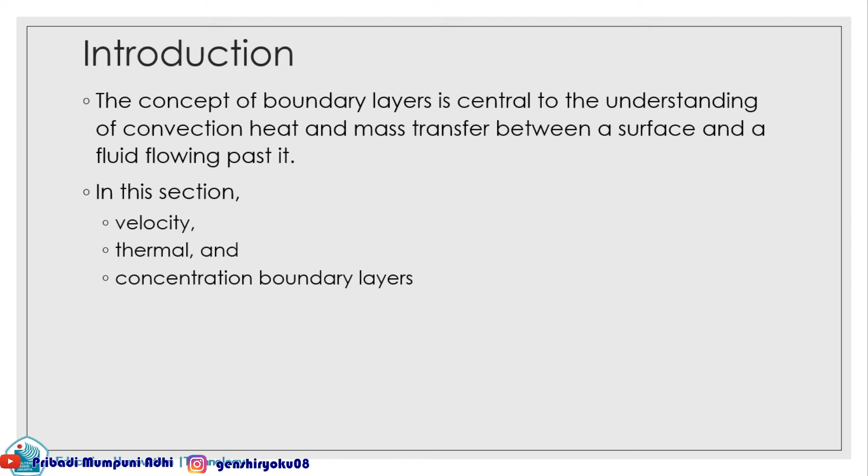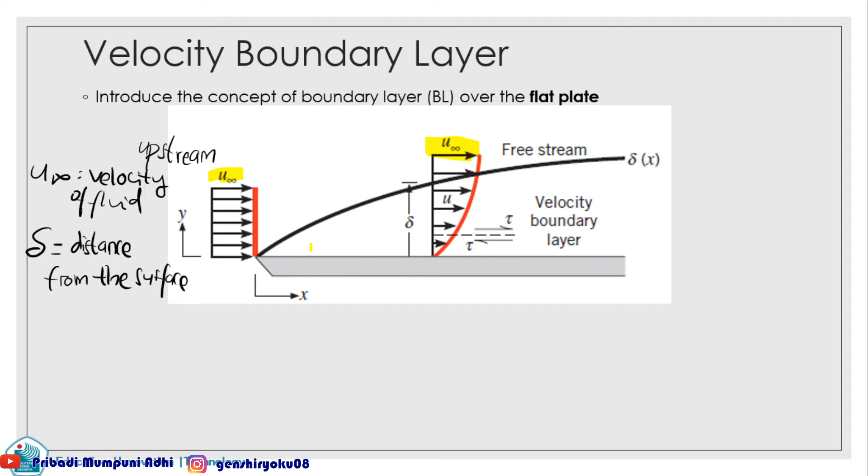So the velocity profile changes, further and further from the surface. So this velocity will be equal again with the free flow. So if we draw, this is the curve. The velocity profile will be like this curve.

And also it varies with the x direction. It depends not only on the distance from the surface, but also on the x. The x direction means how long the fluid has flowed on the plate. So with increasing distance y from the surface, the x velocity component of the fluid, u, must increase, until it approaches the free stream value of u infinity.

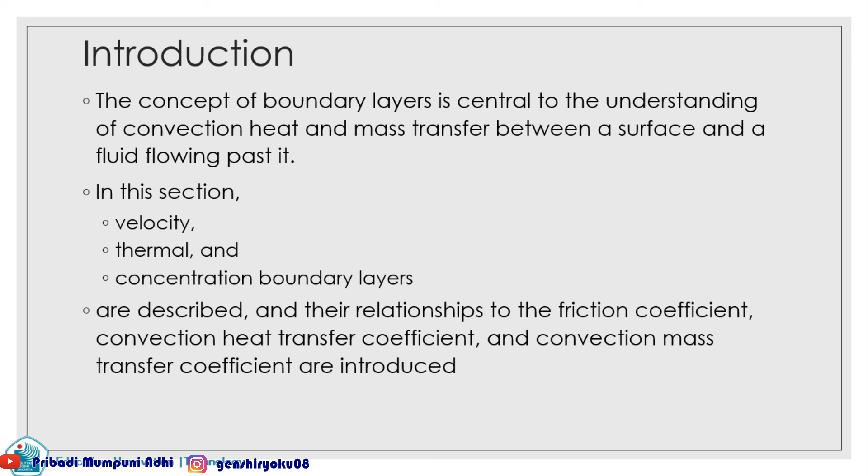Okay, so I will recap again. There are three types of boundary layer in this part. First is the velocity, the second is the thermal, and the third is the concentration boundary layer. The velocity boundary layer is due to the velocity difference between the free stream and near the surface, and it's influenced by the shear stress.

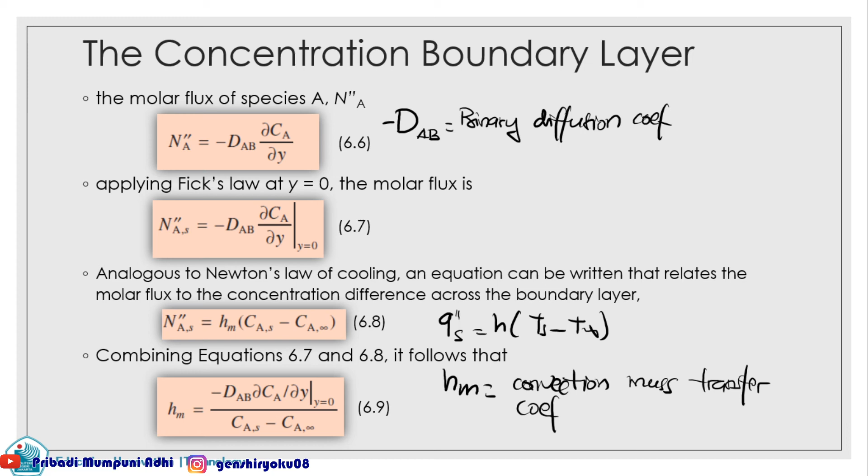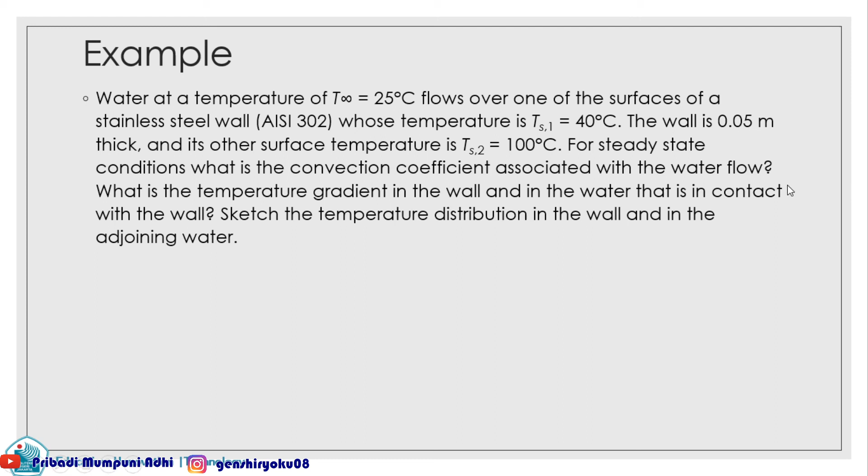Okay, so this one is the illustration. So what we know, the known is the surface temperature of steel wall and the temperature of the water flowing over the wall. Okay, so we can see here. Jadi ini adalah wallnya ya. Wallnya thicknessnya 0,35. So the TS2, this is without the fluid flow, the temperature is hotter, is 100 degrees C. On the other hand, the temperature when there is a water flow, TS1 is 40 degree C. So we need to find the convection coefficient and the temperature gradient in wall.

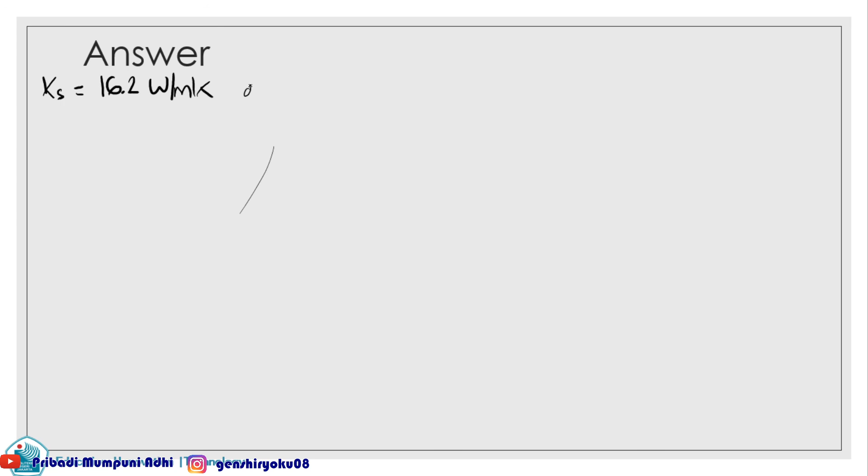Oke. So, we will need the KS ya. KS itu apa? This is the thermal conductivity of the steel ya. So, the thermal conductivity of the steel, the AISI 302 is 16.2 watt per meter Kelvin, at the temperature 100 degree C. And we need to know also the KF ya. The KF is the heat conductivity of the fluid.

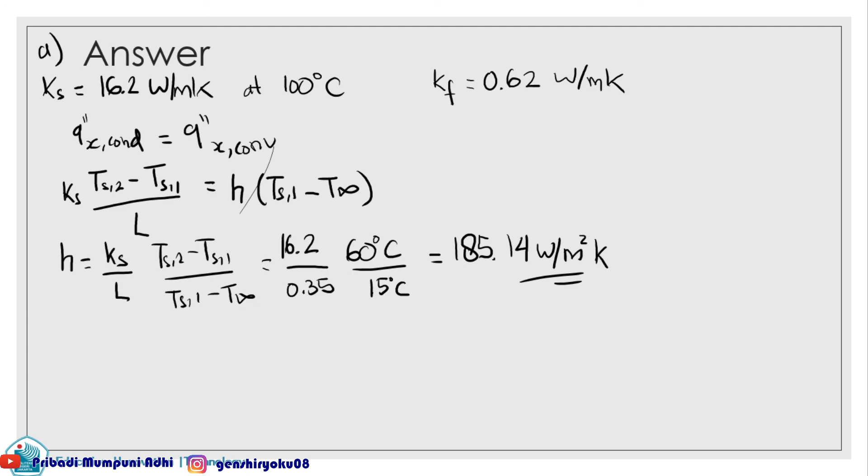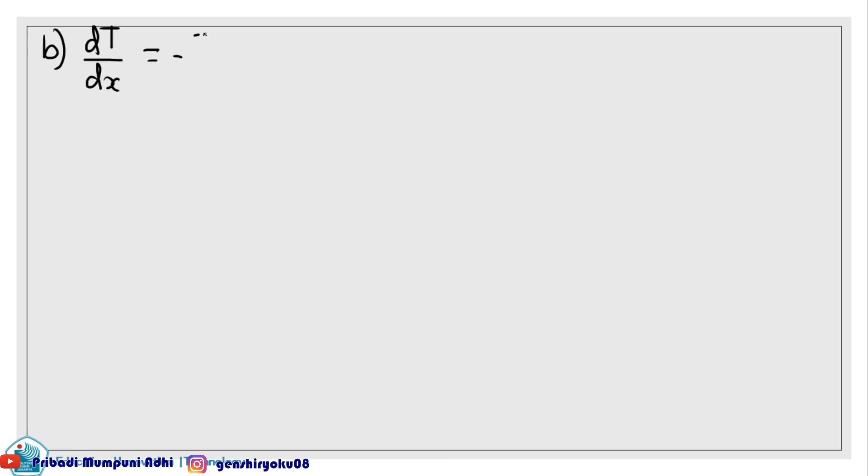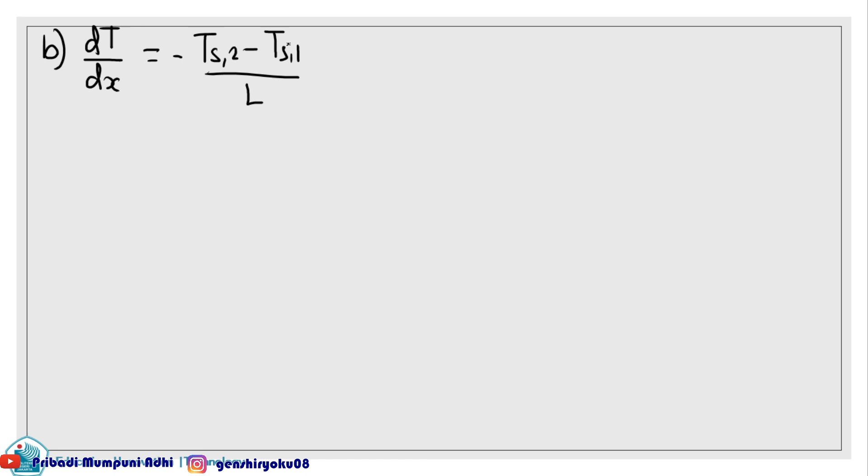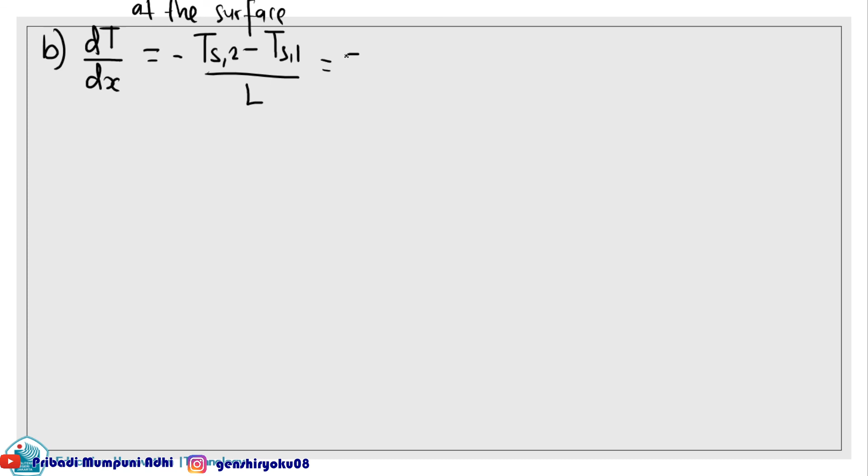B ya. Pertanyaan yang B-nya itu kan we need to find the gradient ya, perubahan temperatur gradiennya. So we know that the temperature gradient is the dT over dx. So it means this is minus Ts2 minus Ts1 over L ya. Ini ketika dia berada di surface ya. So this is at the surface. Ini temperatur gradiennya adalah ini. Maka ini adalah minus 60 degree C over 0.35 ya.